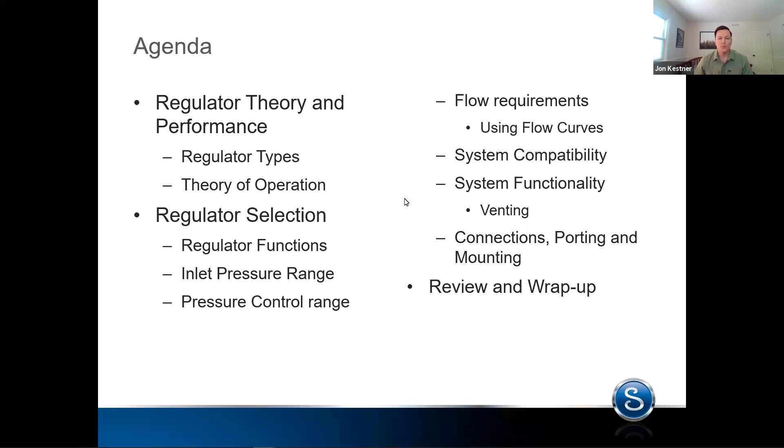So when we think about the types of regulators in general, the first thing to consider is, what are we actually asking these units to do? There are 2 major types of pressure regulators that you see in industry, and that's pressure reducing and back pressure. Pressure reducing are far and away the most common type of pressure regulator. If you hear anybody mention regulator or pressure control valve, most often they're talking about a pressure reducing regulator.

We'll talk more about that a little bit later.

Now, on the other side of the process, there's back pressure regulators. These actually work in a similar but slightly different way, governed by the same inner workings, but back pressure regulators control the upstream pressure. So where pressure reducing regulators are most interested in what's happening downstream, controlling the outlet pressure, back pressure regulators control what's behind them - they control the upstream pressure.

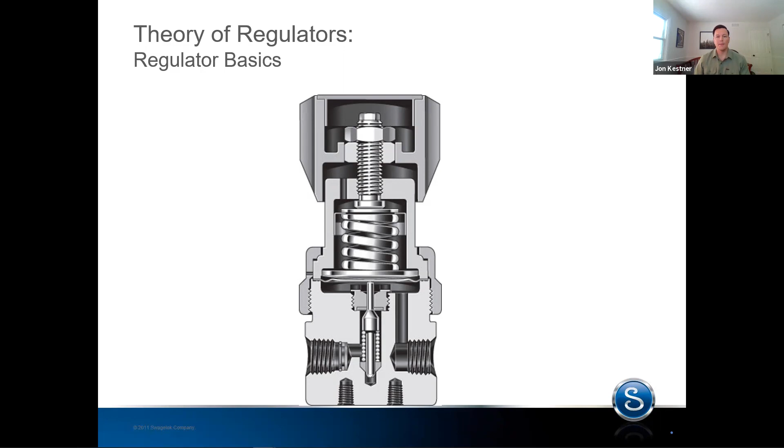When we think about regulators, there's a lot of components, but we really only care about 3 elements. Those 3 elements work together to do the job of a pressure regulator, which is essentially to divide the system into high pressure and low pressure. So within a pressure regulator, there's 2 zones, the high pressure zone and the low pressure zone. Those are divided, or the pressure drop happens, at the poppet and seat interface.

So in most every regulator, you're going to have some sort of a valve which will interact with a seat, and we call that the control element. The combination of those two is the control element, because it controls the pressure drop. So that's really where the work is done in a pressure regulator, right here at that control element.

So as the poppet moves away from or closer to the seat, you'll get varying levels of pressure drop depending on what your system flow demand is. So the control element is a very important piece of regulator performance and behavior. You'll hear me talk a lot about it today.

Now, next, we as users of regulators need some way to tell that regulator what we'd like it to do. And we do that through the loading element. Most commonly this is a spring, although we will talk about other loading types, namely dome-loaded regulators, a bit later in the talk today. Most often it's going to be a spring, which can be compressed or relaxed based on how the user turns this handle. You turn it clockwise, you compress that spring; anti-clockwise, you allow that spring to relax. And that loading element is really telling the regulator what it should be doing - what the outlet pressure should be on the low pressure side of the regulator.

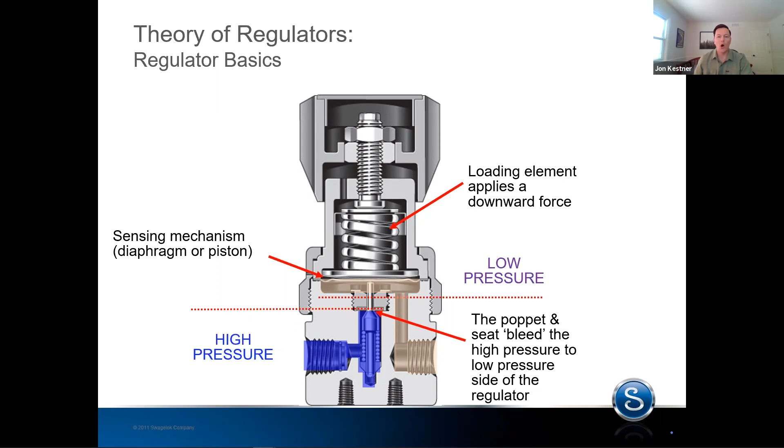So these three elements - the control element, the loading element, and the sensing mechanism - all work together within a balance of forces. That's all regulators are trying to do: they're constantly trying to balance all of the forces within that unit so that you get the output that you want. And there's four main forces that we're concerned with.

One is the loading force. We talked a little bit about that - that's as the user turns the handle, they're either going to compress or allow that spring to relax. And so that's going to create your loading force.

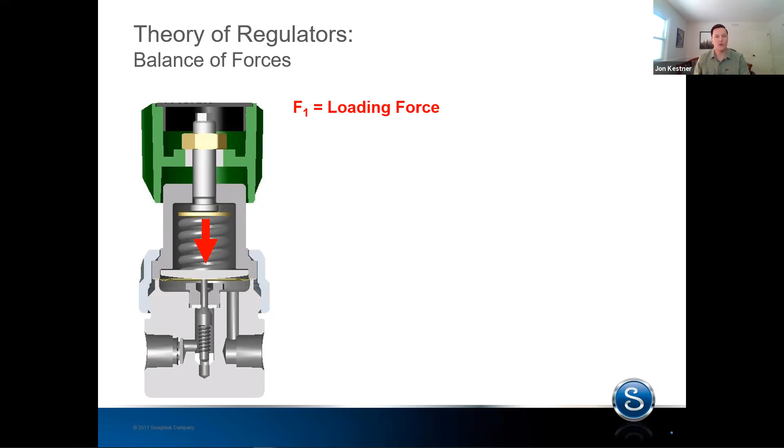So as you compress a spring, depending on the spring rate, you'll get some sort of force out of that. That generally acts in a downward direction.

Now there is an inlet spring force. We'll talk more about this later during selection, but most pressure reducing regulators have a spring that sits just underneath the poppet to help keep that poppet shut if there's little or no inlet pressure. That spring does impart a force. It's pretty small, but we need to consider it as part of the equation.

That generally acts in an upward direction. Now the outlet pressure force - this is what we care about, right? This is why we're using a regulator in the first place, because we want some pressure on the outlet side. Now that pressure acts on the sensing mechanism, the area of that element, and creates a force. Pressure times area gives you a force, and that generally acts in the upward direction.

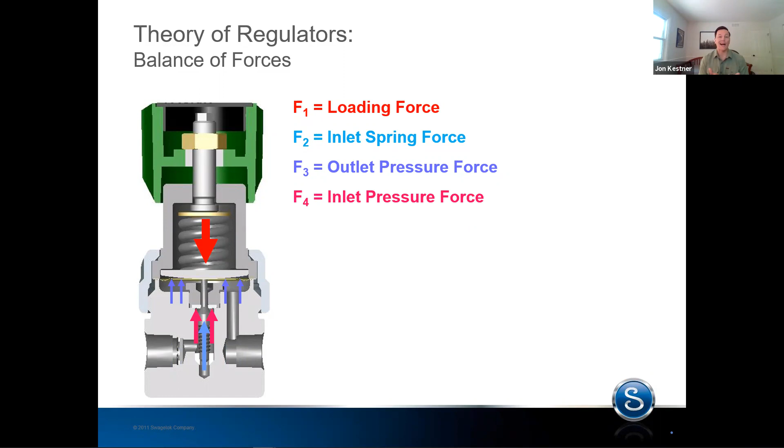And now finally, while a smaller area, the inlet pressure is generally high. So the inlet pressure force is also something we need to consider. That is the force, again, pressure times area on the poppet. And that generally, again, acts in an upward direction.

Now, following along, it's pretty clear how these all balance out. The inlet spring force and both pressure forces, outlet and inlet, work to counteract the loading force. This happens as the system parameters change, as user inputs change. These forces are constantly changing so that the regulator can stay in balance.

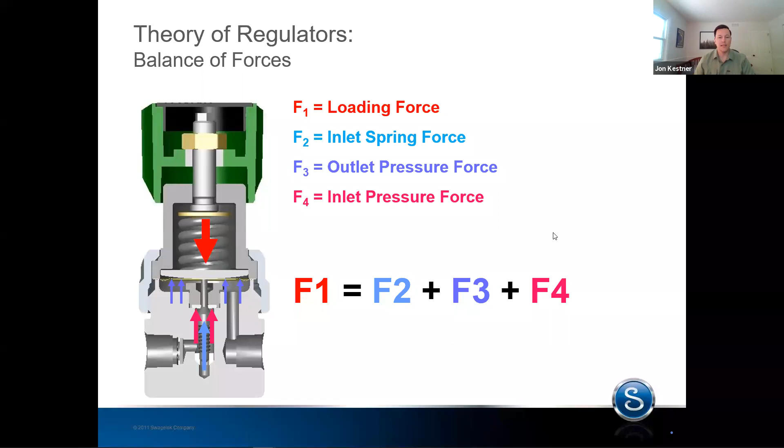A really great example of this is, as the user changes the position of that handle and we compress the spring, the loading force goes up. We compress the spring, greater loading force. Now the regulator's out of balance - our F1 has gone up, but nothing else has changed yet. So it needs to react.

The inlet spring force, that's not really going to change in any effective way. The inlet pressure force, for this example, let's just assume we've got a substantially large amount of volume - that's not going to change very much, which leaves the outlet pressure force, the only thing that can react to rebalance that regulator.

So as we turn the handle and create a greater F1, we get a larger outlet pressure force. This is exactly what happens when you set a regulator. You're compressing the spring, throwing the regulator out of balance, the poppet moves to allow more pressure downstream and ultimately rebalance the regulator. You'll hear me come back to this time and time again throughout this discussion because it is the equation that really underpins all regulator behavior when you're using them in the field.

So any questions on the theory or operation before we get into selection? I know that was pretty fast, but I like to set up the selection using the operations.

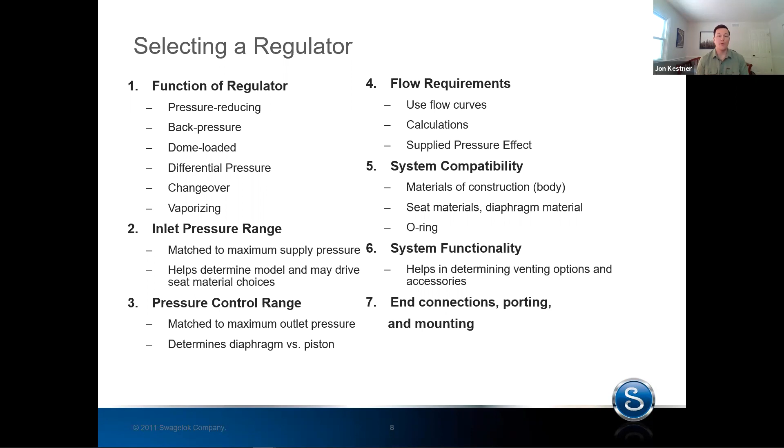The others like system compatibility or function or the end connections, you got to do those with most every component that you select. They're important for regulators too, but it's not something that's specific to regulators and requires a bit more digging into. So most of the time that we spend today, we'll be talking about the inlet pressure range, pressure control range, and the flow requirements, and what effects those have on regulator selection and ultimately behavior.

So the first thing is the function of a regulator. We just talked a little bit about this, right? The two major breaks in function are pressure reducing versus back pressure. So that's really, do you need to drop pressure or are you limiting pressure? Within those buckets, there are some specialty functions, things like differential pressure. That's if you want to reference another point in your system and have the set point actually track along with that reference pressure. You can do that with a differential pressure regulator.

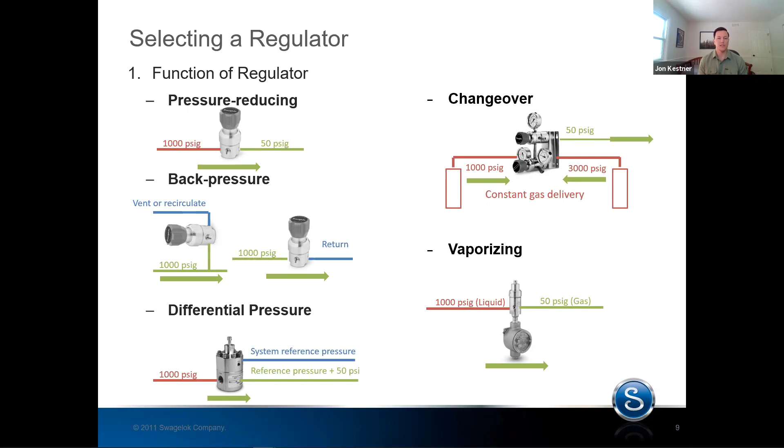If you need continuous supply from a depleting source, something like a changeover regulator can be very helpful. Or if you need to introduce heat or actually promote phase change, a vaporizing regulator can be very helpful. So there's always going to be these little nuances within each bucket, but the main choice is pressure reducing versus back pressure. So once we've figured out our function, and a lot of times that's driven by your system, right?

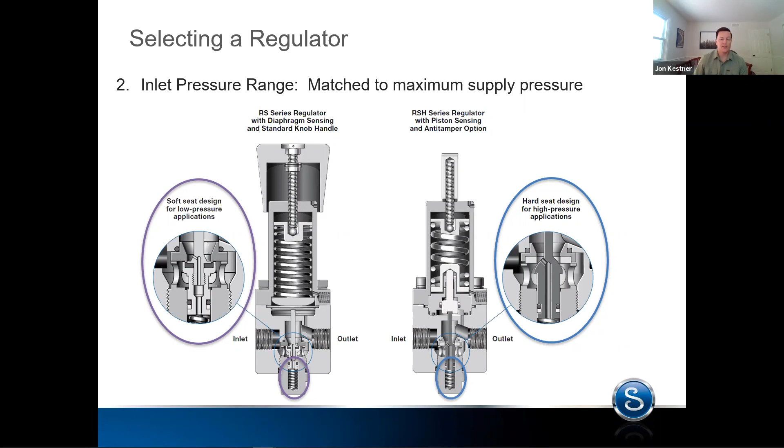What do you need? The next choice really is, what inlet pressure capability should I choose for my regulator? The recommendation always is match it to the maximum expected supply pressure. That's going to drive a few different aspects of regulator behavior, specifically the control element and the seat material more than anything else. So the inlet pressure range is really focused on the control element. Some of the other choices will affect the sensing or loading elements, but inlet pressure range is really focused on that control element, which can affect portions of a regulator's behavior, one of which is lockup.

If you've used regulators before, you've probably experienced this. You may have heard the term lockup, and lockup is the change in pressure when a system that a regulator's in goes from flowing to non-flowing or non-flowing to flowing. So it's this sharp tail that you get right at about zero flow.

If you imagine a valve being turned off in a system, your outlet pressure will uptick slightly. What that's related to is the force required to shut off the seat. Regulators are not shut off devices, although they will shut off. So there's an important distinction there, in that the regulator's closing force is limited - it's the inlet pressure that can force the regulator shut plus the poppet spring.

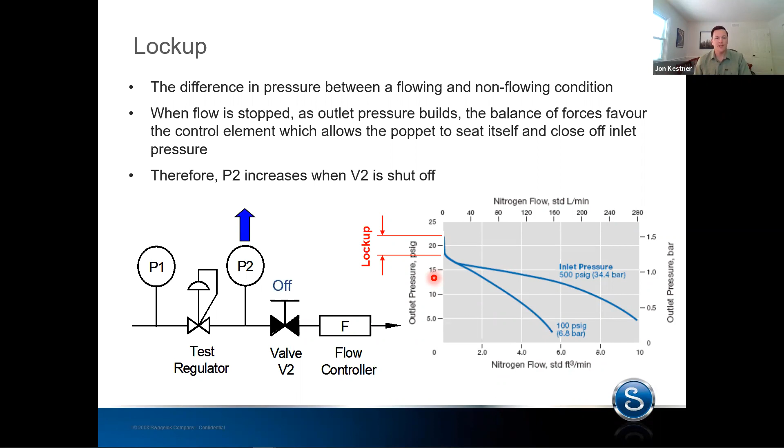So it's not only the lockup pressure that seat material can affect, it's also the ability for that particular material to resist what we call creep. Creep is a very common issue that we see in regulators across the board - all different systems, all different types of regulators. And that is the increase in outlet pressure over time when the system's not flowing. So it's effectively a seat leak when you have that system shut off.

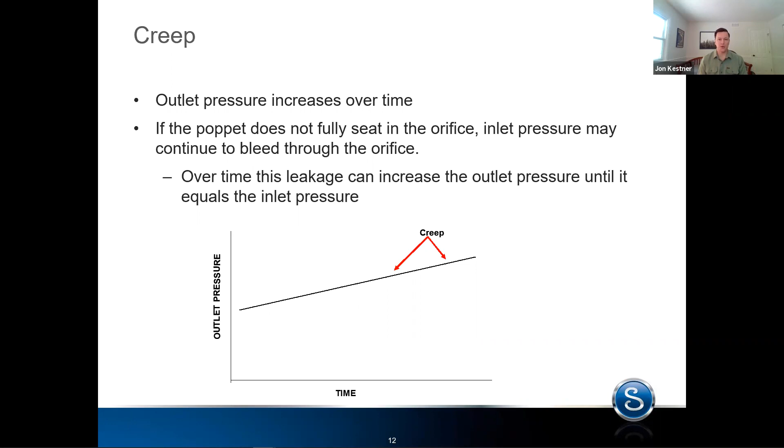What mostly drives seat creep is particulate or damage on the seat itself. We really see two major culprits of seat creep. One, usually we see very early in a regulator's life, is something like a tubing burr - in a newly assembled system, maybe there's a burr that didn't get fully flushed out before the system was put together. That burr, because of the small gap here to create that pressure drop, will almost always get caught in that seat if it makes it there. So you can imagine as that poppet then tries to shut, if there's that metal particle in there, it won't be able to deform the seat around that particle, and you'll get a slow seat leak or creep.

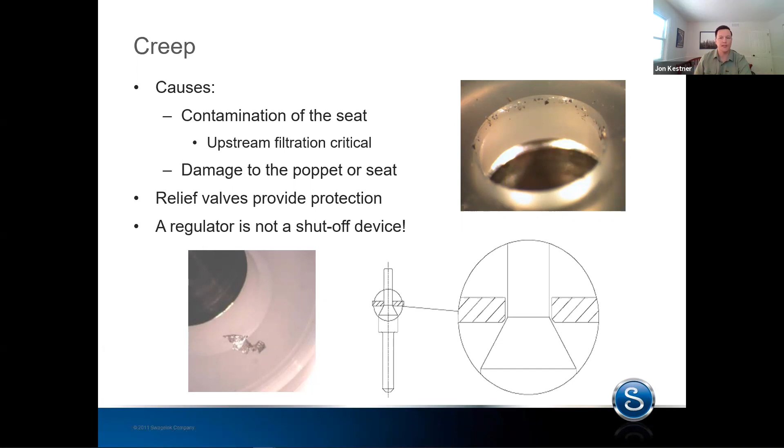Now on the further end of a regulator's lifetime, it's been in the system for a while, it's been working well, but over time maybe has accumulated some debris through bottle changes or whatever else. Over time, you could see regulators develop a seat leak as these particles reach a kind of critical mass, and the seat can no longer deform around those particles. When a regulator is flowing, this usually isn't a big deal because the balance of forces will compensate for any changes in the seat. But when you shut off a regulator, that's where you can really run into some issues.

So if we think about creep in this system I've got up here, the downstream components are selected to handle low 100 PSI, but we have a high pressure system. So we need to make sure we're not allowing that high pressure to bleed into the low pressure side. If this regulator displayed creep, then maybe this 100 creeps up to 110 or 150, or if it's really bad, you could get to a situation where the high pressure inlet equals the low pressure outlet, which would be very high pressure at that point, right?

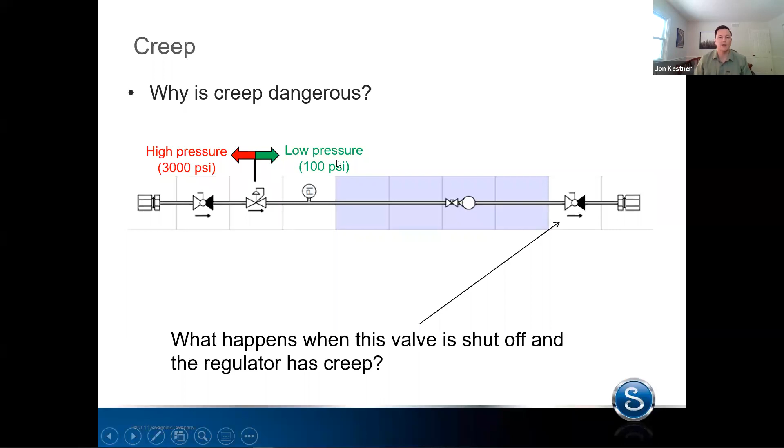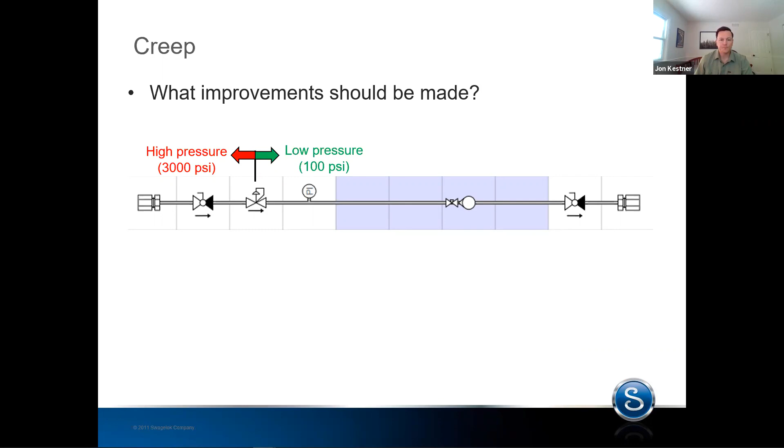3000 PSI. So there are things we can do to mitigate the risk of creep outside of seat choices, which we'll talk about next. But one of them is filtration, right? So we can filter any particles upstream of a regulator. It's always a best practice if you can include a filter upstream of the regulator.

Our standard with integral filters for the models we sell that have integral filtration is 25 micron. It seems to cut a good balance of particle filtration and lower flow resistance, right? So you don't want something so restrictive that it'll catch all the particles, but then your flow performance is impacted. So 25 micron seems to be good.

You can also add a relief valve just downstream of the pressure regulator. This is pretty common, I see this everywhere, right? It's a pretty common engineering practice, where you have a stretch of the system that needs to stay at a certain pressure. Very often that's protected by a relief valve. It's a really good practice if you're not already doing it.

And then finally, one that I think gets overlooked very often is, if you can, just shut off upstream of the regulator. Because again, regulators will shut off, but they are not shut off devices. If you have a situation where there is some creep on a regulator, you don't have the opportunity to get in and really crank down on the handle like you would for a needle valve or anything like that, where you can introduce some extra closing force. You're kind of stuck with what the regulator has. So if you can, shut off upstream. It's not always possible, but if you can, it's a good thing to do.

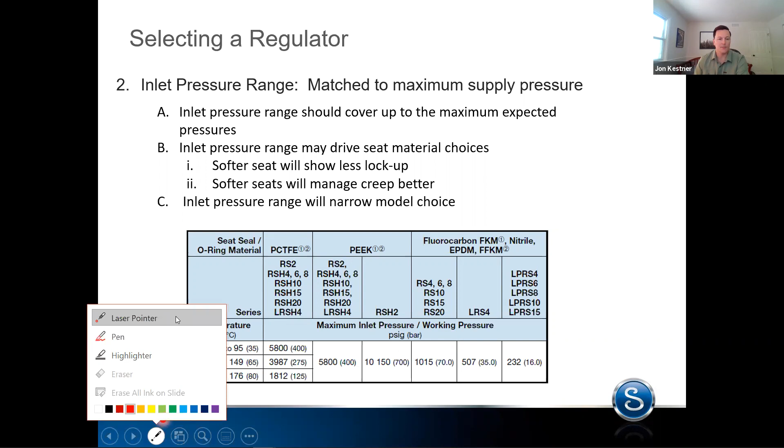So if you have a regulator where maybe it's a system of 800-900 PSI inlet, and you're thinking, well, should I go with the hard seat and extra pressure capability? If the specs call for it, absolutely. But if you have the choice and lockup and creep are a concern, using an elastomer seat can be really helpful. So something to consider there. Now, sometimes the inlet pressure makes the choice for you. If you've got a few thousand PSI inlet, you have to use a hard seat. Just keep an eye on creep for those models because they can show creep just like any other regulator could.

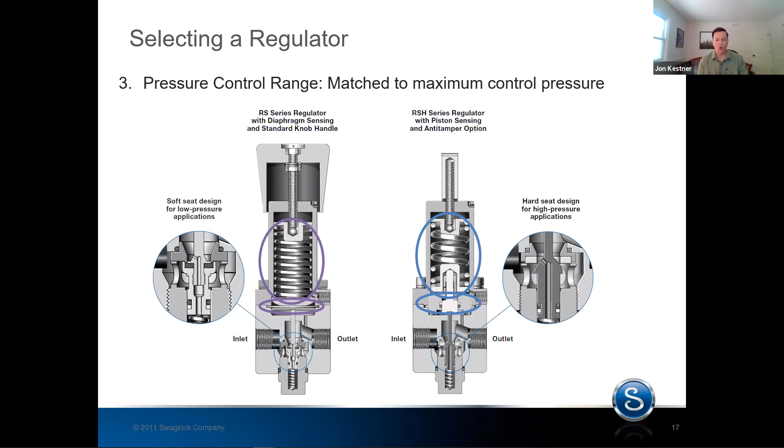So once we've selected an inlet pressure range, we need to move on to the outlet side. So we selected for the high pressure zone. Now we need to select for the low pressure zone. And this really is related to the loading element and the sensing element. Choosing a control pressure that's most closely matched to the set pressure will give us the best control out of that particular regulator. So the first split is a lot like our seat choice, right?

Generally governed by what pressure you're controlling downstream. Diaphragm sensing elements are typically used below about 500 PSI. They've got high sensitivity and will respond quickly to system changes. Generally, they're thin pieces of metal or elastomeric materials, right? So really flexible.

They offer a really good sensitive reaction for the regulator, but because they're thin diaphragms, they are limited on what pressures they can control. Now, pistons give you a much wider pressure control range, but because they also vary in size—lower pressure pistons will be bigger, higher pressure smaller—they'll give you variable sensitivity. Sensitivity is a function of the area of that sensing element.

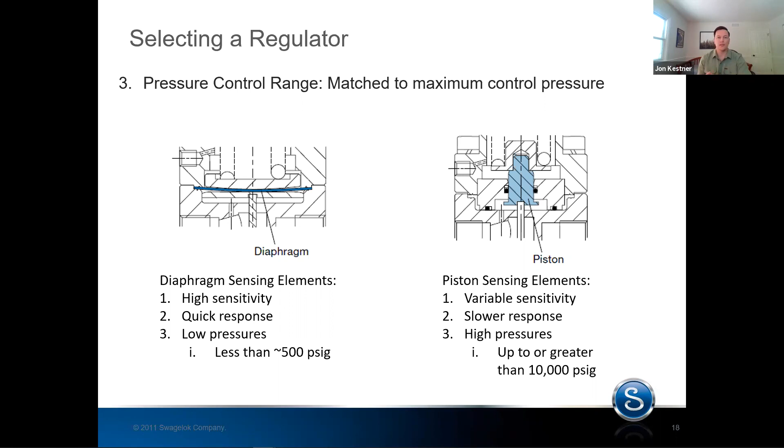They also will respond slower, which initially sounds all negative, but in some systems, like those with positive displacement pumps that might have some residual pulsation, a piston style regulator will handle that a lot better than a diaphragm style will, and can actually dampen out some of that activity. And of course, they can be used at much higher pressures.

So the pressure control range also impacts the loading element. I talked before that the loading element is what we, the users, get to interact with, and that sets the outlet pressure. So what I want to show is what happens to a regulator as the flow demand from the system increases. This is called droop.

For anybody who's watched a regulator work and changed the flow demands, you've likely seen this or experienced it, or even heard the term droop. It's one of the most common performance aspects of regulators that folks are concerned with. So what I want everyone to watch is the outlet pressure—it's going to decline as we increase flow. But also take a look, and I'll run through it a couple times, at the control, sensing, and loading elements and how they react to the increase in flow rate.

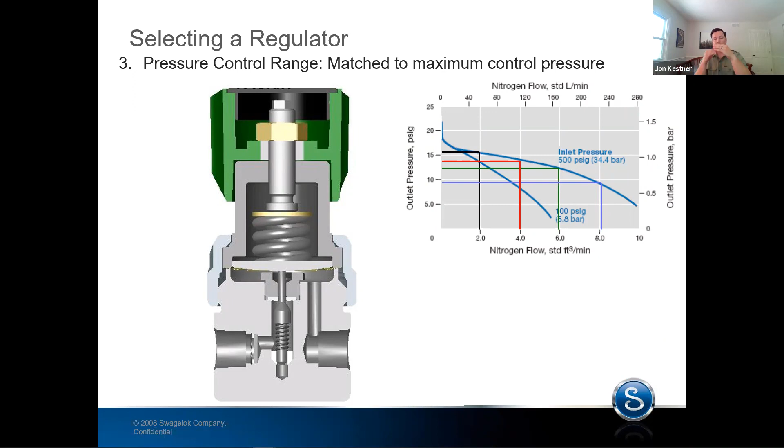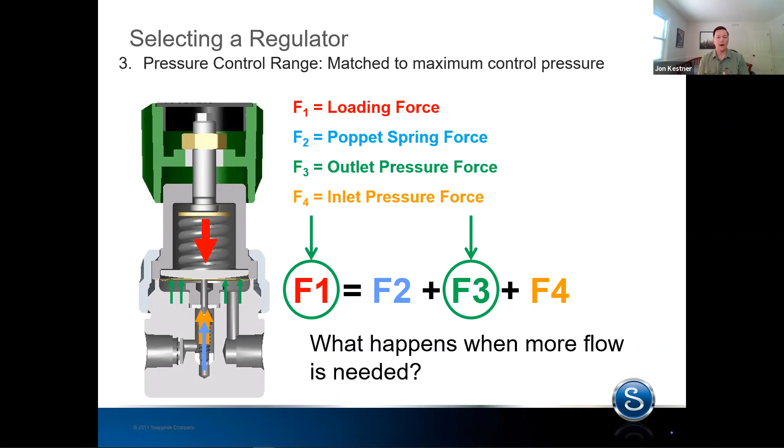As we increase the flow rate, we're seeing that the poppet moves away from the seat. It wants to maintain the same pressure drop with more flow, which means it needs to move further away. But that also allows the loading spring to relax slightly. As that poppet moves away, that loading spring can relax, which, if we remember from setting a regulator, means the F1 is actually going to go down. Different than when we were compressing it by turning the handle, here F1 goes down. And just the same as setting a regulator, F3 will also go down by some proportional amount—not 1-to-1, of course, but it will go down by some amount. That's what drives your droop in spring-loaded regulators.

So in spring-loaded regulators, the droop is a function of the spring rate used in the loading spring. What that means is if you have a pressure regulator set to 90 psi outlet, and you use a 0 to 250 psi control range, that will show some amount of droop. Now if you use the next lowest control range, say 0 to 100, that spring will actually show better droop performance because the spring rate is lower. So for every millimeter that spring is allowed to relax, you give up less force, and your droop performance is actually better the lower the control range is.

This is a bit different than what most folks expect, especially having worked with things like gauges. With gauges, you want to be in the middle if you can, or at least the middle third. For regulators, they're quite happy to work all the way up to and including the upper end of their control range. In fact, you'll get a more accurate and more consistent pressure out of a lower control range than you would a higher control range. I think instinctually, folks select regulators to pair with their pressure gauges—it makes sense, those two go together quite frequently—but the approaches are a bit different. Gauges are most accurate in the middle. Regulators are actually most accurate with a lower control range, even if that means operating at the higher end.

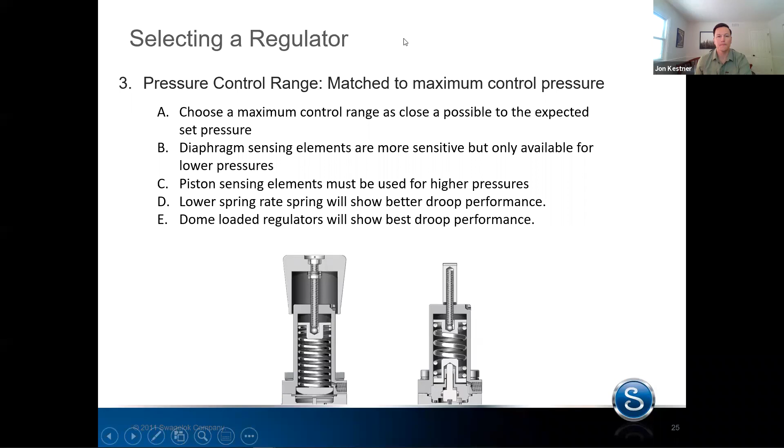Okay, so flow requirements. This is one that I get asked about almost every time I talk about regulators: how do I know how much flow I can get through this regulator? Or, I have this amount of flow, what regulator should I use? It's a principal concern of selecting a regulator. And what I always say is that bigger is not always better. In fact, it never is with regulators. You want to find the smallest seat that can carry the flow rate you need. That gives you the best accuracy and most consistent performance across the life of the regulator.

So to do that, you want to use, first and foremost, the flow curves, because this is tested data showing what the regulator is actually doing during a test, versus calculations, which are very helpful, especially with larger regulators, but you really can't determine droop from calculations. We'll talk about both in just a second.

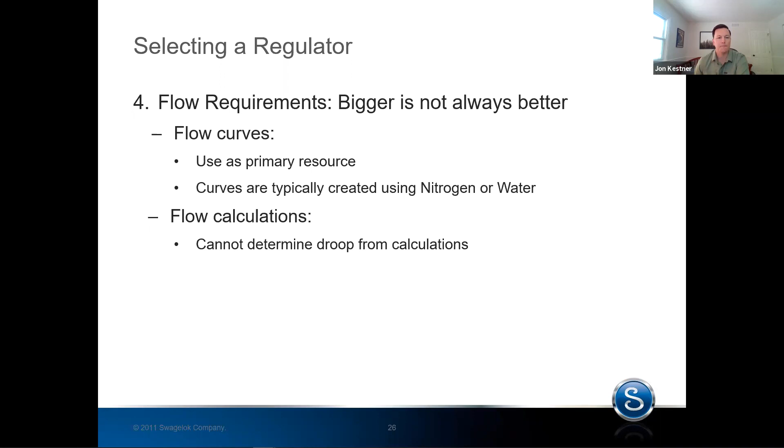So in terms of flow curves, you can learn a lot. There are two primary ways flow curves are used. One is, will this regulator work for my application? That's the one I want to cover first. Before we get into that, I'll cover a little bit of what info you can get out of a regulator flow curve.

Now the chart tells you outlet pressure versus flow rate. So as my flow rate changes, how is my outlet pressure going to vary? That's really what we want to know as regulator users—how consistent is my outlet pressure going to be. So for answering the question of whether this regulator will work for a particular application, flow curves are a great place to start.

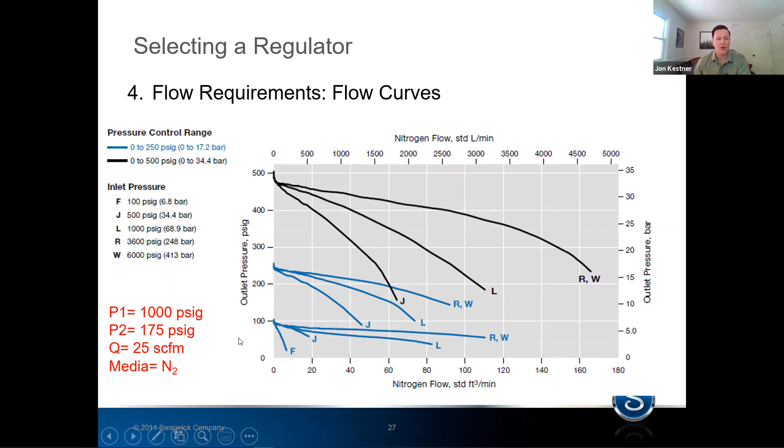Next, we want to find the L curve that covers our outlet pressure. To do that, we start at our flow rate—about 25 SCFM—and start drawing a line upwards. We hit our first L curve; that's not nearly enough pressure, so a set point of 100 obviously isn't going to work. Next, we continue drawing up and up until we hit the next L curve—and look at this, it's actually above 175. So we know we can get at least 25 SCFM with 1000 PSI in.

In this case, it's set all the way up at 250, but we probably don't even need to do that. We can set it a bit lower and still achieve our 175 PSI pressure limit.

So what we know is for this system, a pressure regulator with 1000 PSI in and 250 out will cover 175 PSI at 25 SCFM. So that's one way that we use flow curves.

The next is, how much pressure change should I expect from this pressure regulator when I put it into my system? Same kind of setup. You can see in this curve, we actually printed the inlet pressures on the curve. The first thing to do is find the right curve. In this case, we have 507 PSI or 35 bar inlet pressure, so we know we need to use one of these curves. We also have a static set point, so a zero flow set point at 250, so that means this 507 curve is the one we want.

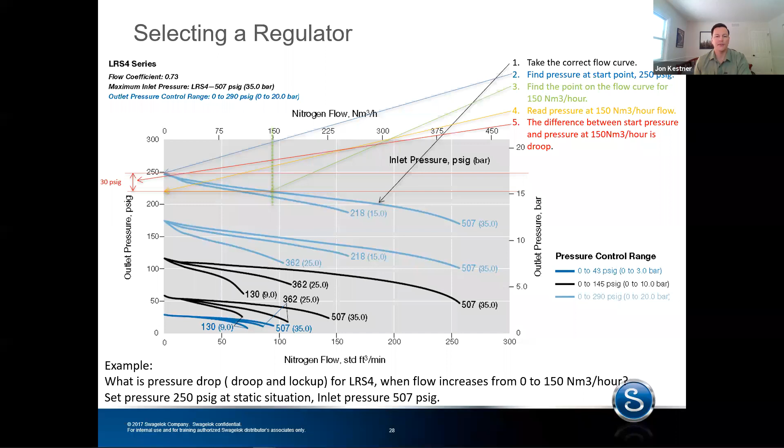And obviously you can also do that in the bar scale.

Now, we also can size regulators using calculations, and each manufacturer has different ways of doing that. For Swagelok, when we calculate a regulator size, we aim to put that regulator in the one-third to one-half of the way through its flow capacity, right in the middle part of its capacity from a flow perspective. Now, what we don't get when we just do calculations is any way to know what the droop will be. Historically, those were the two choices.

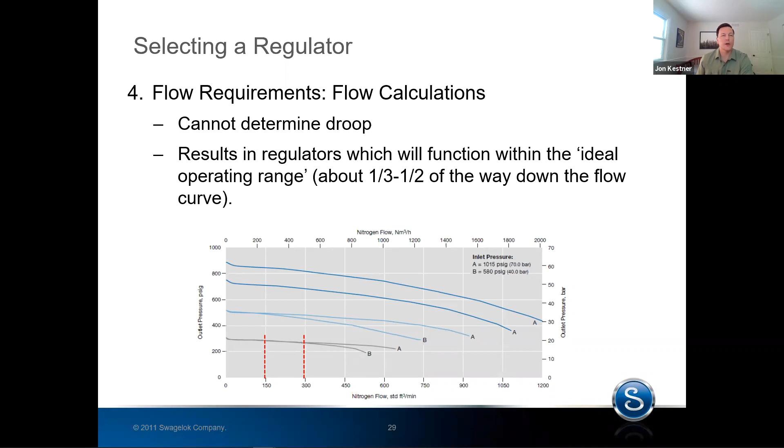A few years back, we created a flow curve generator. Essentially, we took that mathematical model and applied it to varying flow rates. It was actually a really cool exercise to do with the product engineers for regulators and our CFD folks, who came together to create this flow curve generator, which is a bit of a mix of both methods. So it is calculated, they're not tested curves, obviously, but you do get a sense of what kind of droop performance you could encounter, and that is for your specific application. It's available on swagelok.com, available to everybody if you want to use it for sizing regulators. You put in what regulator you're interested in, all of your system parameters, and it'll spit out what kind of performance you could expect. You can also compare two separate regulators, or the same regulator in a few different systems, and you really get some good flexibility there. So it's a great tool to use if you are sizing or trying to determine regulators for a specific system.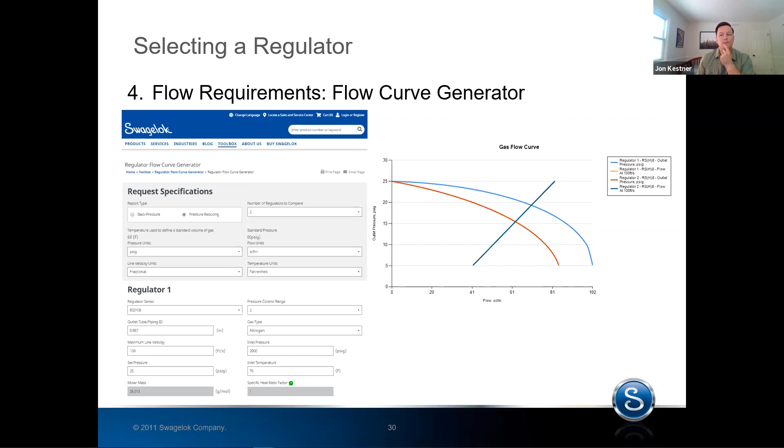At the beginning of this section, I mentioned that bigger is not always better, and one of the principal reasons why is the supply pressure effect. The supply pressure effect is the way a regulator reacts when you have a changing inlet pressure. Up until now, we talked a lot about what happens when the flow demand changes or the operator changes the position of the handle, and how the outlet pressure changes. But very often these regulators are connected to gas cylinders that over time have a tendency to deplete. As you're using that gas, that pressure is going to go down. So what we need to understand is, what does that do to the balance of forces?

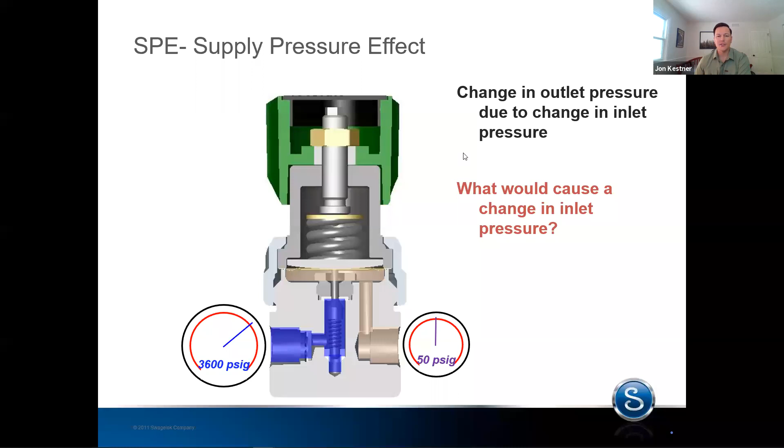Coming back to how regulators operate, if we think about the four forces, these will be impacted by a change in inlet pressure. Now F1 and F2, the two spring forces, we're not changing the loading force at all, and we're also not going to change the inlet spring force because that's built into the regulator, so those two are constant. But as your inlet pressure drops, so will F4, because F4 is a function of your inlet pressure. So as your F4 decreases, the only thing that can maintain balance is F3.

So F3 is actually going to increase slightly in proportion with that F4 decrease. Now, it's not one-to-one, right? That would be really problematic if you had a gas cylinder that starts at a few thousand PSI and drains down to a couple hundred, if you had the same outlet pressure rise. The amount of rise, commonly called the supply pressure effect, is related to the ratio of areas on the poppet—what area the F4 is acting on versus what area your outlet pressure is acting on, F3. So the ratio of these two areas is what gives us the supply pressure effect.

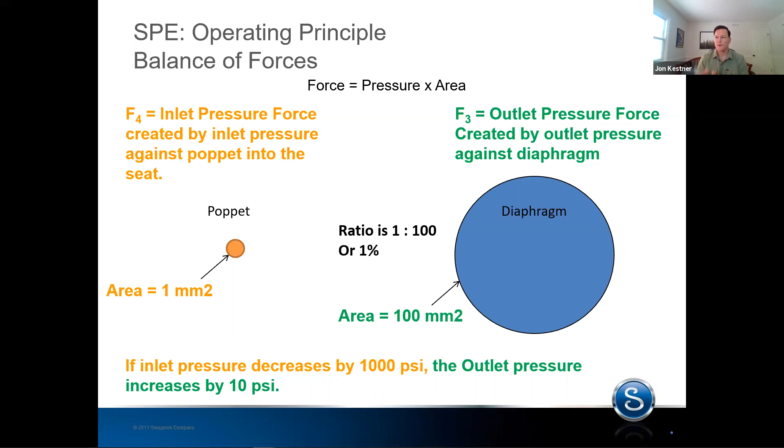So as a quick example, making the math easy, if you had a 1 millimeter square area on the poppet, so that's your seat area, and 100 square millimeter area on the diaphragm or sensing element, you would have a 1% SPE. So what this means is if your inlet pressure decreases by 1,000 PSI, your outlet pressure will increase, but only by 10 PSI—1% of 1,000. So let's look at a practical example to talk through it a little bit.

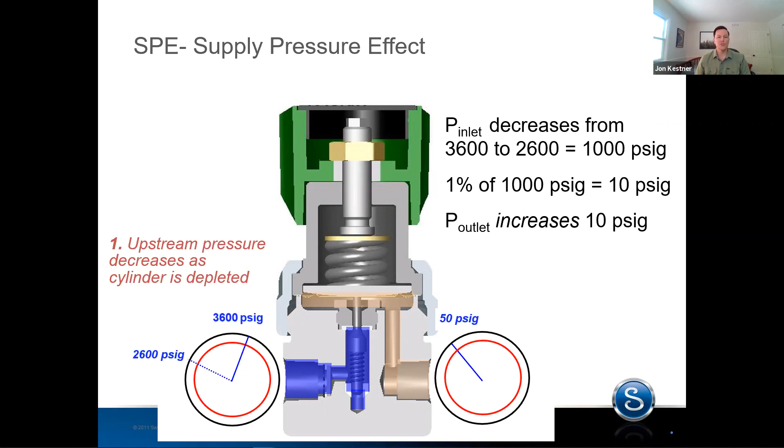So we have a regulator hooked up to a gas bottle that starts at 3,600 PSI, and we've got an initial set point of 50 PSI. So as my upstream pressure is depleted, 3,600 to 2,600, and we know that this particular regulator has a 1% SPE, that means that my outlet pressure actually increases by about 10 PSI. So as that upstream pressure depletes, the outlet pressure will rise by 1% of the inlet's depletion, which in this case is 10 PSI. For some systems, this is fine—it doesn't cause any issues. But where it does, we need to think about ways to mitigate supply pressure effect.

And one of them clearly is just maximize the ratio. So use the smallest seat you can with the largest diaphragm that you can, right? Which in many cases for general industrial regulators is just choose the smallest CV that you can that'll carry the flow rate you need. And that will give you the best supply pressure effect performance.

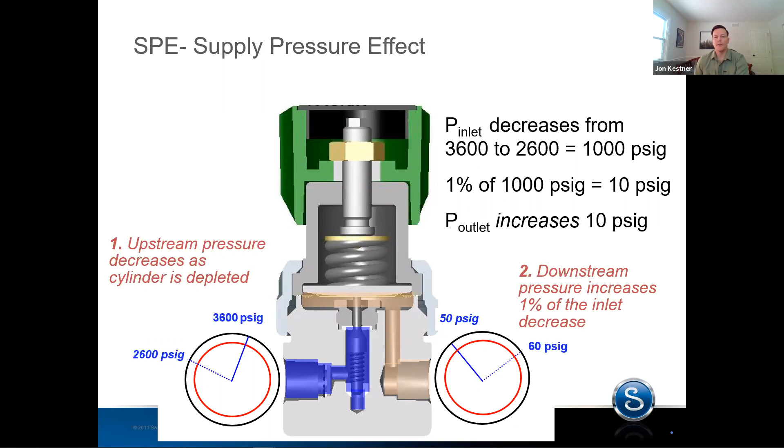Now, where that's not possible, or you need to have, for one reason or another, a regulator that still doesn't quite meet your SPE needs, the next best way to mitigate is actually using two regulators. So if we think about what happens with the supply pressure effect at each stage, we'll better understand why this is such an effective way to combat the supply pressure effect.

So in this case, again, we start at 3,600 PSI, we end at 50 PSI, but we have a middle stage pressure of 500. So that first stage is actually set to 500, which is in turn the inlet for the second stage. So let's watch what happens as we drop pressure. We go down this time by 2,000 PSI on the inlet pressure, which creates an increase in the outlet pressure of the first regulator. That's what we expect, up to 520 PSI, 1% of 2,000.

Now the second regulator only sees this increase. The change it sees is an upward change of 20 PSI. So it reacts in the opposite direction, it actually goes down, but only by 1% of the 20 PSI. So down by 0.2 PSI, which if you're looking at an analog pressure gauge, you really won't even notice. It's not going to affect your system. It's effectively eliminated the supply pressure effect.

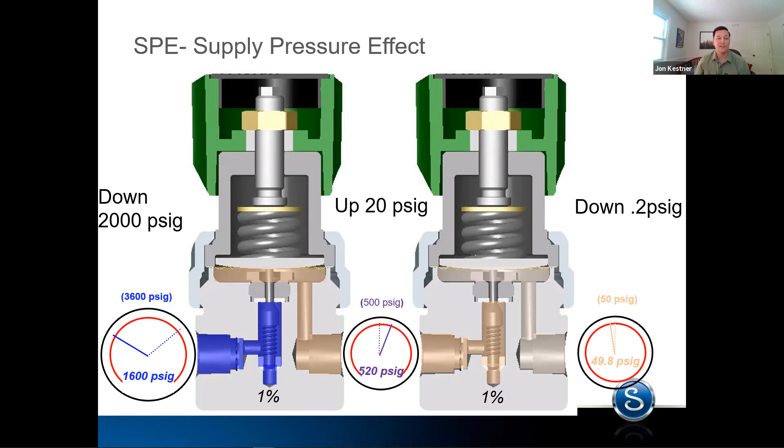So two-stage systems or two-stage regulators are really effective at reducing the supply pressure effect, especially where you need to use a larger seat for the flow capacity. And they come in all different varieties, right? You can make your own two-stage system like you see here with 2 regulators, or Swagelok certainly does, and other manufacturers do too, where you can combine those regulators into one body.

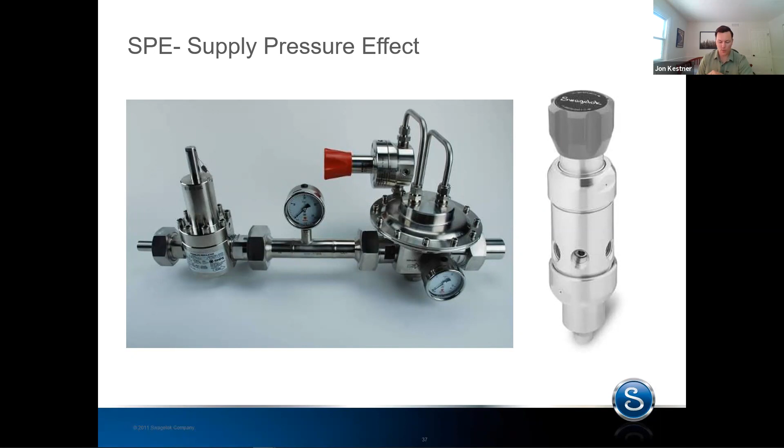So when we think about flow requirements, again, bigger's never better. Use the smallest seat you can by using the flow curves to determine what regulator is most appropriate. And flow curves are the first choice, of course, and calculations are kind of a second after that. Now, if you can use something like the flow curve generator that we've got, it kind of mixes both, right? But using that small seat will minimize SPE, and you might not even have to go to a 2-stage system.

What questions do you have on flow requirements? Jon, we had a question just a minute ago. How is the CV calculated? Do we have customized CV values for different customer requirements?

Good question. For most pressure regulators, and this is true for all Swagelok regulators, the CV that's posted in the literature is a full open CV. As you can imagine, regulators are constantly changing their CV as the poppet moves closer to and further away from the seat. So the most consistent position to measure a CV is in the fully open position.

That also has the knock-on effect of giving a very good indication of what the fail open flow rate would be for a pressure regulator, which can be really important when sizing things like relief valves or orifices.

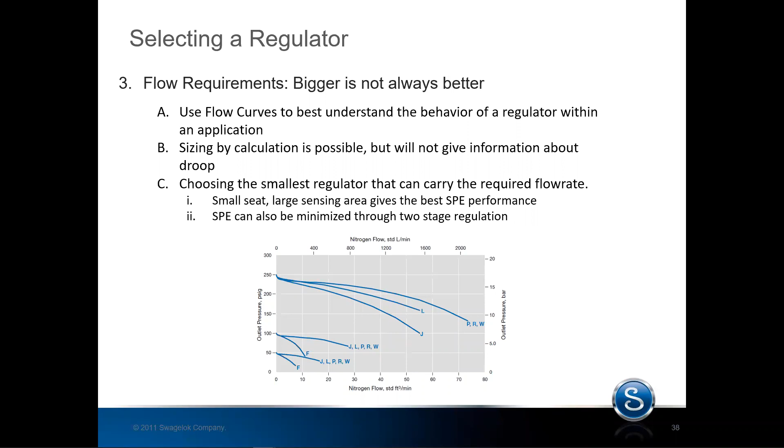Okay, it looks like we have another one here. What is the need of a back pressure regulator when similar operation is performed by a relief valve? Yeah, it's a great question. It's something that comes up a lot.

The main difference is control. So for those systems where you want to have fine control of your upstream pressure, a back pressure regulator is going to do a much better job than even a proportional relief valve.

So things like a safety valve, which slam open, obviously you don't want that happening all the time, every day, all day. But even a proportional relief valve, which opens and closes with pressure, the sensing area on a relief valve is much smaller than a back pressure regulator, which has the whole diaphragm or piston to sense that upstream pressure. So the resolution and accuracy you get from a back pressure regulator is much higher than a relief valve, although the functions are very similar.

A back pressure regulator can also be used in line, whereas relief valves really aren't. A good example of that is downstream of an online process analyzer, maybe used on a liquid line where you want to make sure the pressure is high enough to avoid the bubble point. You typically will put a back pressure regulator at the end of the line so that it maintains that upstream pressure at a high enough level.

So it provides that control by opening and closing so that you don't run into any sort of issues there. Great question, and something that definitely comes up a lot, but it boils down to accuracy and resolution more than anything else.

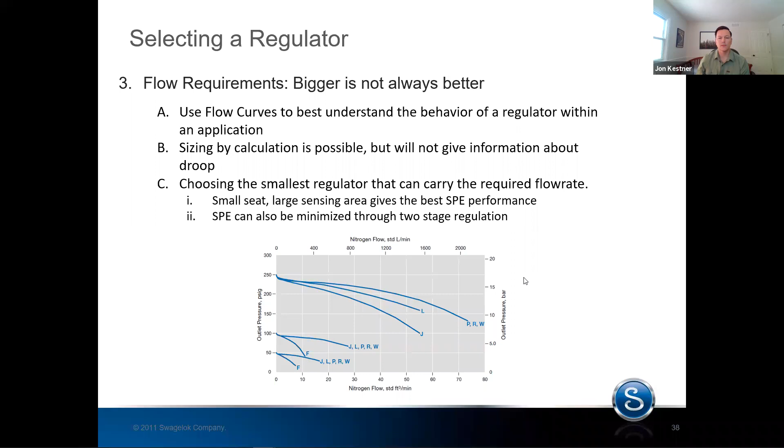What else? Okay, yeah, good questions. So at this point, we've kind of got through all the hard stuff. We know what inlet pressure we're using. We know what outlet pressure control range we're using. We figured out how big of a regulator we need. Now we need to get into some of those more detailed questions.

Are the materials of construction compatible with the fluid that I'm pushing through this thing, particularly as it pertains to the seat and seal O-rings? It's something you do with all components.

With regulators, especially for gas, there is one additional effect that we need to consider, which is Joule-Thomson. Joule-Thomson is a physical phenomenon. It's not specifically brought on by pressure regulators, but Joule-Thomson is the drop in temperature as the gas is allowed to expand or pressure goes down. So in a regulator, we're doing just that. We're dropping pressure, so we consequently see a temperature drop quite often.

And it can be significant. You could see tens of degrees, if not hundreds sometimes in extreme cases. So it's just something to consider: is the system set up to handle that Joule-Thomson effect? For natural gas, you can see about 1 degree C for every 2 bar in pressure drop, which is about 2 degrees F for almost every 30 PSI in pressure drop. So it can be significant.

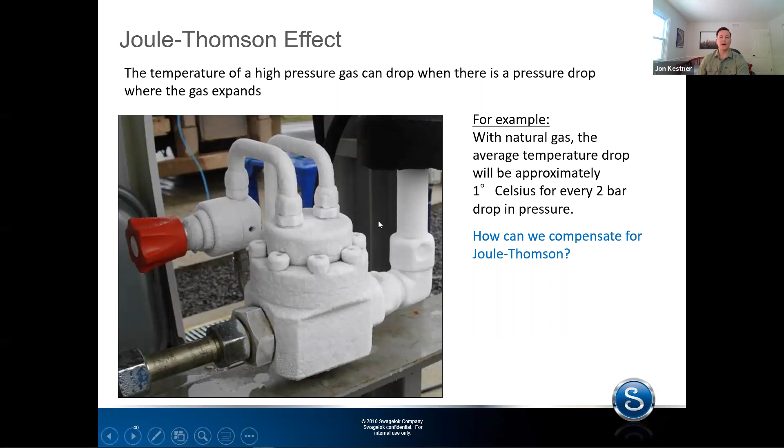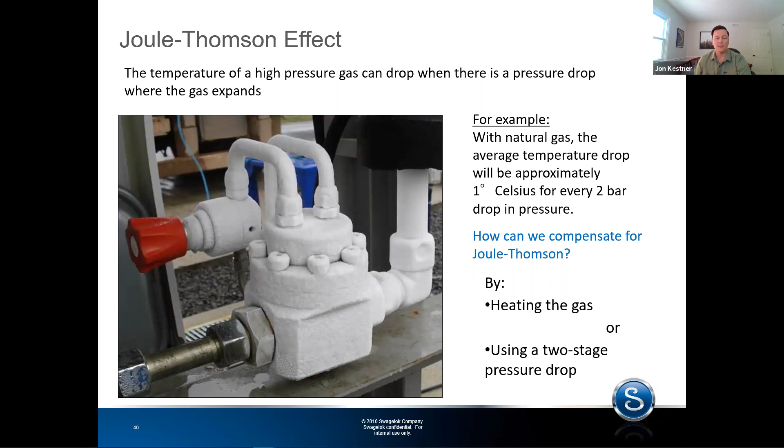You can compensate for that either by heating the gas or using 2 stages. There's a lot of different methods you can do, and don't ever hesitate to engage the local team if you need assistance there.

Now, next is how does the system function? So a lot of this is how do we as users interact with the system? What kind of handles do we have? Do we want a lockout? Where are they mounted? What kind of gauges? How is the system configured?

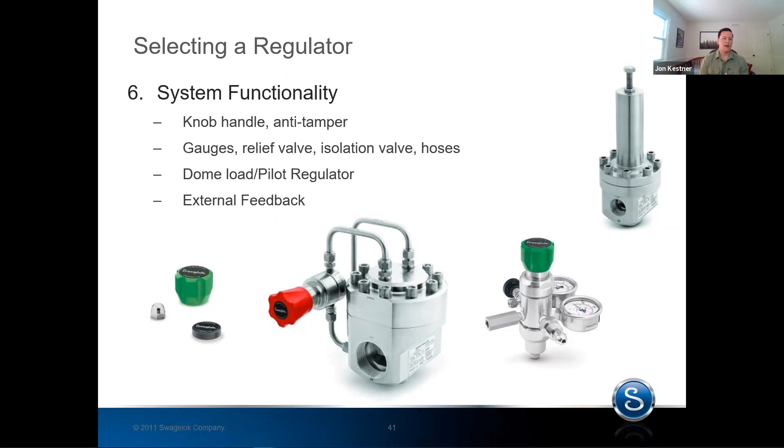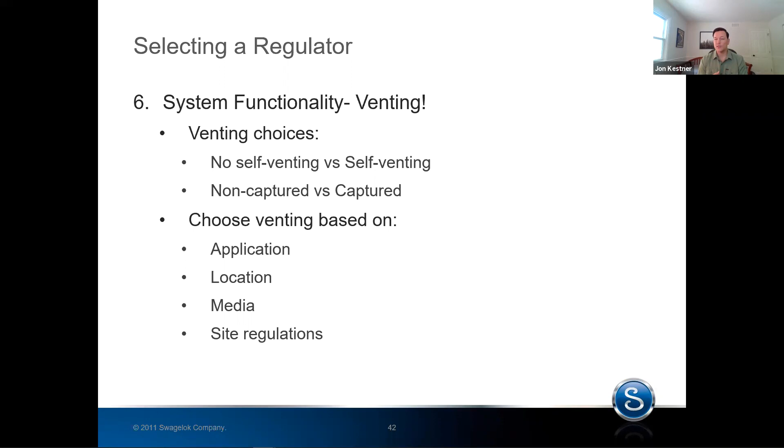One of the most important choices is actually venting. Venting is a topic that splits into two choices: self-venting versus non-self-venting, and captured vent versus non-captured. They're two independent choices we'll talk about, not really related to each other. You can have any combination you'd want, and it's all based on what you're doing with the regulator, where it is, what kind of fluid is going through it, and what safety regulations you need to comply with.

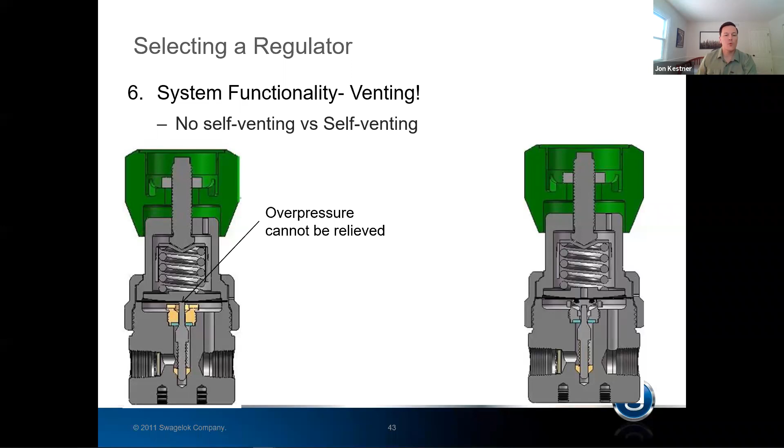Self-venting versus non-self-venting has everything to do with where the extra pressure goes. In a common configuration, a non-self-venting regulator does not give any trapped pressure anywhere to go. Imagine you closed a ball valve just after the regulator, and if we turn the handle to relax that spring, the outlet pressure won't change because the gas or liquid has nowhere to go. Whereas in a self-venting regulator, doing that same thing, the outlet pressure will actually take over and push the sensing mechanism off the seal. There are different seal mechanisms, but the simplest is just an O-ring and a hole that creates your seat, which pushes up to allow that excess pressure to escape.

Self-venting is about changing set points often. Lab benches are a great example, where you're constantly changing set points—a self-vented regulator might be a good choice there. It shouldn't be considered a replacement for a relief valve, though. The orifice is really small and the sensitivity is not great. So don't have it take the place of a relief valve, but where you're changing set points a lot, it's totally okay—I think it's a great use for self-venting.

Captured versus non-captured has everything to do with what happens to the gas or liquid as it escapes the regulator. For a non-captured regulator, in the Swagelok set, it actually escapes under the handle to avoid blasting an operator, but it does escape to atmosphere. If you're outside or in a well-vented area with a non-hazardous media, that's probably okay—nitrogen in an outside environment is fine. But nitrogen in a really enclosed space can be problematic.

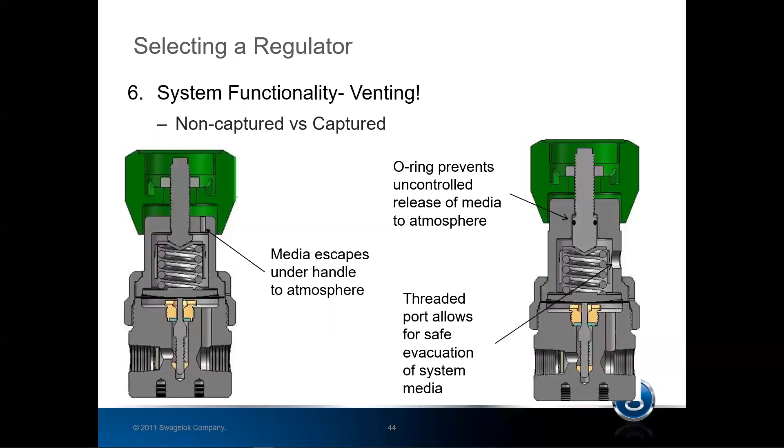Any other questions? Okay, we have another one just real quick. When exactly should a self or captured vent be used? Yeah, so it's a great question.

Whereas with a self-vented regulator, those same changes can be made on the fly, and that excess pressure will be relieved. So as you change the set point of the regulator, if the loading spring is significantly lower force than the outlet pressure, that pressure has somewhere to go. You don't have to manually vent it downstream somewhere, the regulator will do that for you. So in terms of uses, that's really the best place for a self-vented regulator.

Now, when we think about captured vents, they're all about safety. So if you have a media that is particularly hazardous, or an enclosed space where you don't want that nitrogen venting into the air, it would take a heck of a lot, but it could be problematic. That's where you want to use captured vents.

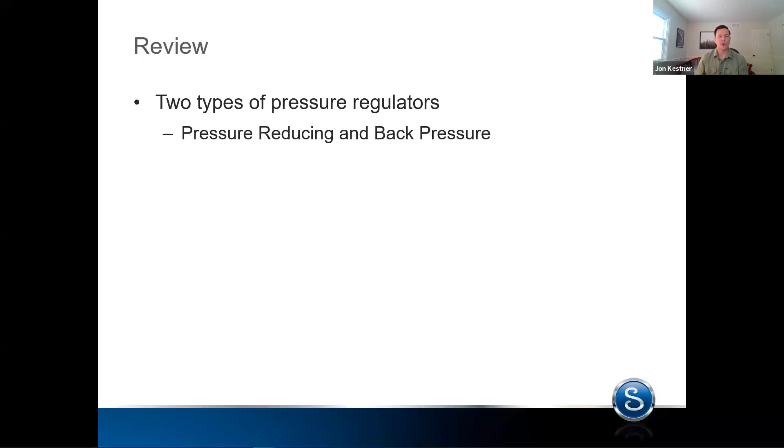There's two types of pressure regulators: pressure reducing and back pressure. Those are the two main functions, right? The control, loading, and sensing elements drive regulator performance. So changes in those elements are going to affect how that regulator behaves.

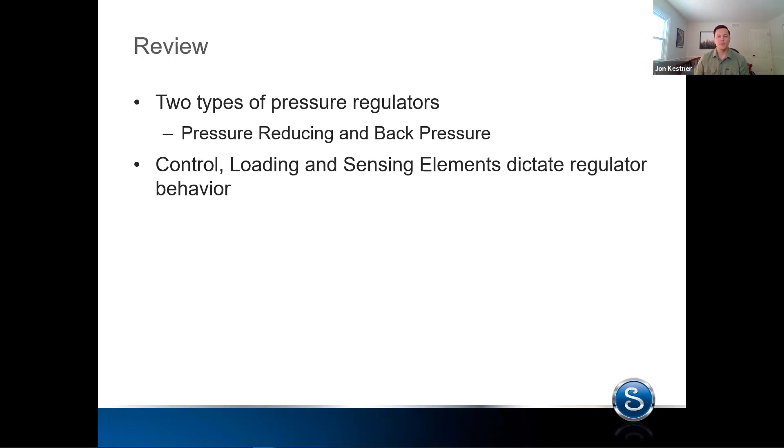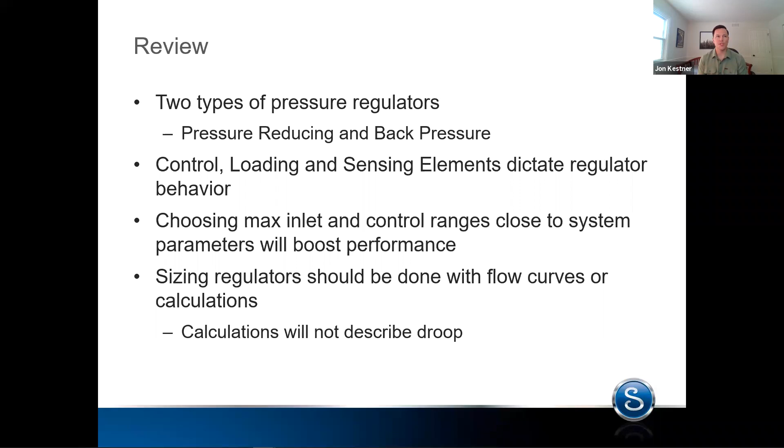You want to choose your inlet and your control ranges to be as close to your parameters as you can. It's going to give you the best performance. If you can, size regulators using flow curves. Calculations are great, they won't give you any indication of droop, but you can use tools like the flow curve generator to kind of meld those two approaches together.

And then finally, self-venting and captured vents. Those are based on the application and what kind of safety concerns you have on site or for that particular environment. And with that, follow along these steps, and you'll get to a regulator that's going to perform really well in

99.5% of applications. So, like I said, I'll hang out. I'm happy to answer any questions, any other questions that anybody might have.

Looks like we have one that says, with vent regulators, should we keep a tab on internal wetted components, spring, etc., to be changed at certain intervals?

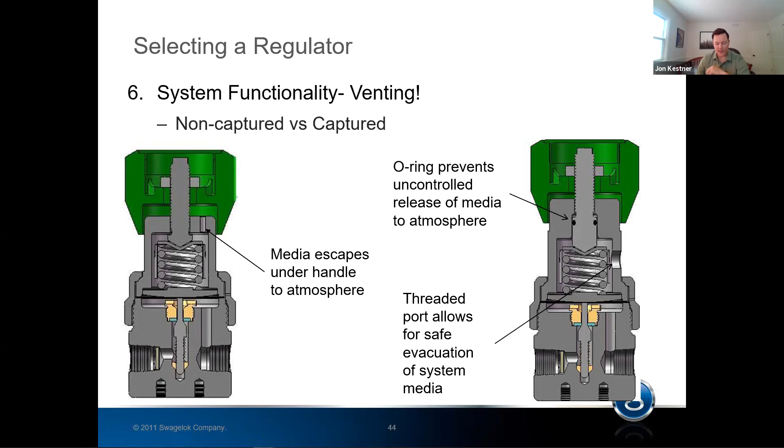Yeah, so it's a good question, right? And one that's particularly interesting for captured vent regulators. So if you have a captured self-vent especially, you could, over periods of time, have all of these components exposed to whatever that fluid is. And so over time, you may want to keep an eye on things like the spring and all that.

Now, that being said, we take care to make sure that the materials of construction, at least in our regulators, are pretty suitable for any of those medias that you might get going through there.

But it's a really good piece to put in if you're developing a preventative maintenance or an inspection or testing plan. If you have those self-vent or captured vent regulators, add those components, the not traditionally wetted components, to that plan.

So springs are a big one. If you have a pretty corrosive media, certainly talk to folks about what spring material might work best, but just add them to the inspection plan.

And then in terms of regulators in general, how often, I get that question a lot, how often should we be going in and inspecting parts, doing tests, doing teardowns or maintenance?

And the first answer is, whatever the local regulations require. So here in the States, we don't have too much prescriptive regulation as far as pressure control components. Places like the UK and Europe are a little bit more controlled as far as how often they need to either maintain or replace. I think it's 5 years in the UK that you have to either maintain and test or replace the unit.

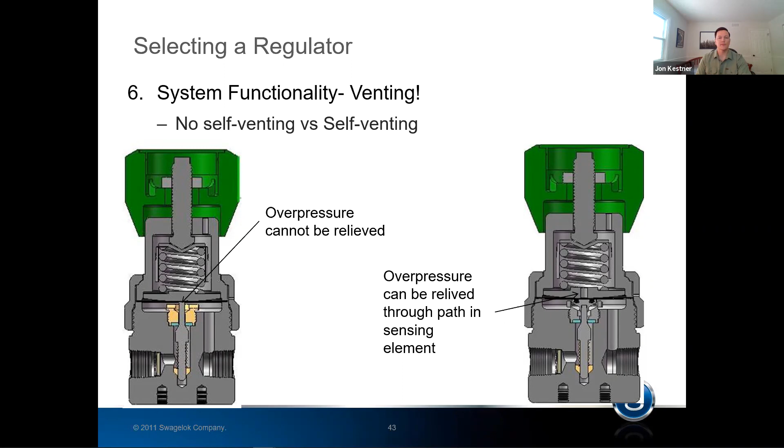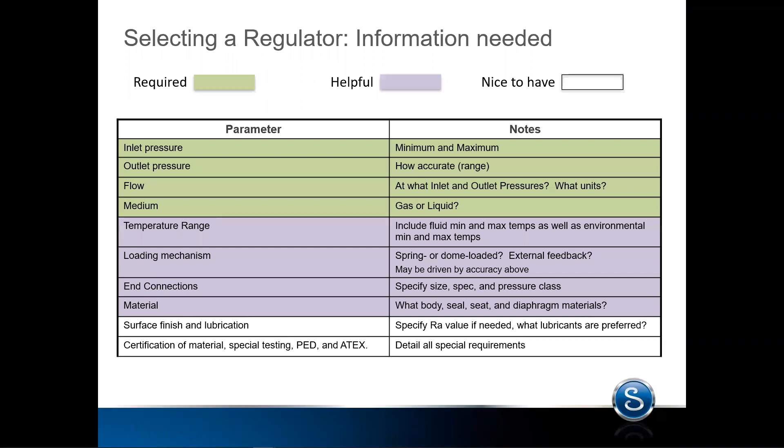We have two more here. First, is it best practice to use an isolation valve upstream of a pressure reducing regulator, or vice versa?

Yeah, that's a good one, and it relates back to our discussion on creep. If you can, isolate upstream of a pressure regulator, and that does a couple things for you. One, it allows the regulator to be kind of freed from pressure isolation.

If you isolate here and vent down the system, you'll have zero pressure upstream, zero pressure downstream. The regulator's happy. Now, what it does is, something to consider, is that regulator then doesn't have any other forces balancing against your set point or loading force. So the regulator will actually sit in an open position, which is actually good, because you don't want that regulator taking a set on the seat if it's closed for a long period of time. But you will get a slight overshoot when you start the system up.

We actually test for this in our production testing. All regulators go through production testing, and part of that is an overshoot test. Essentially, that regulator seat needs to catch up before it can start controlling pressure. Generally it's well below 10% of the control range. So on a 0 to 100 PSI regulator, you might see 3 or 4 pounds of overshoot, and then it quickly gets back under control. So upstream, if you can, that's going to give you the best creep performance.

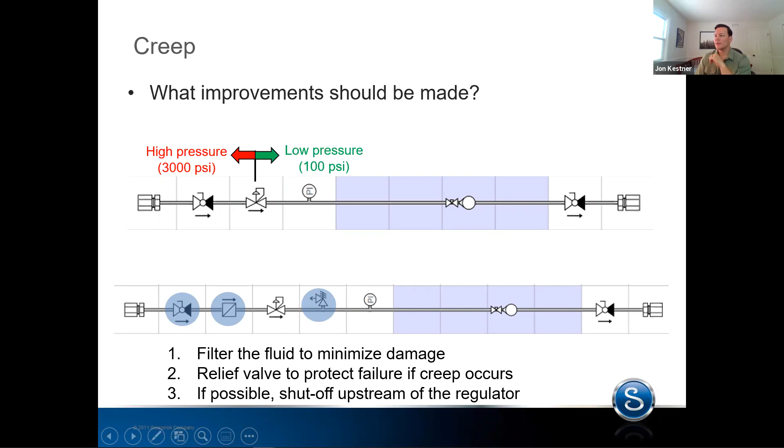I'm trying to see if I have a decent slide for it. Not really, probably the best one is our flow requirement slide. So the question, as I understand it, is the best practice for setting a regulator from lower pressure to higher pressure, or the other way around, higher pressure to lower pressure. And you've got it exactly right, in that the best practice is always to set with increasing pressure. The reason for that is actually related to the spring, but it's actually a phenomenon called hysteresis.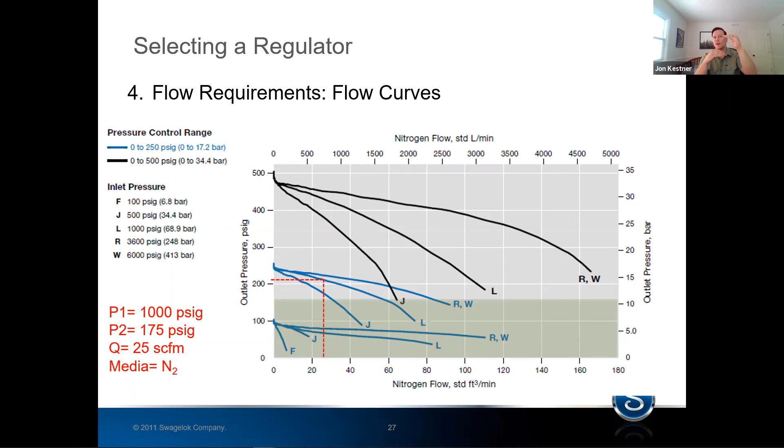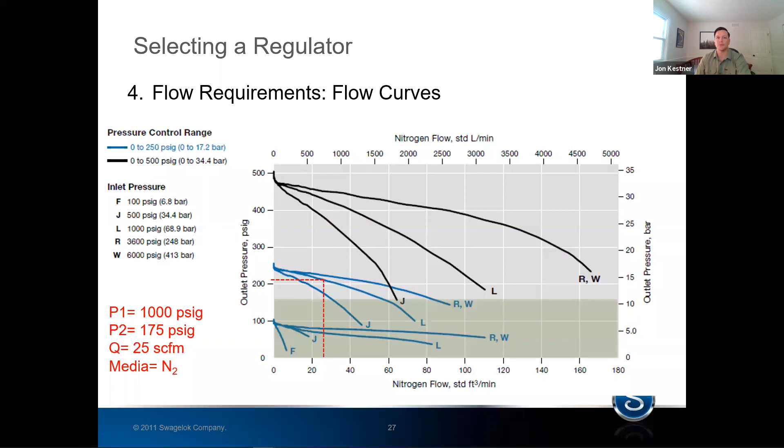You will eventually hit 400, but because of the internal frictions in the regulator, so all those O-rings and the sensing element, the poppet, things like that, you'll actually see that over time you'll go from 400 down to maybe 395 or 390 as that regulator settles in. Whereas if you go from low to high, you don't get any of that settling out, and you stay in a pretty consistent pressure. So it is always a best practice, if you can, set from low to high pressures due to that hysteresis, which again is not something we specifically covered today, but is a consideration for those types of situations.

Okay, we have a couple more questions here. First, can you explain the working of dome-loaded regulators with feedback option? Also on the dome to outlet pressure ratio.

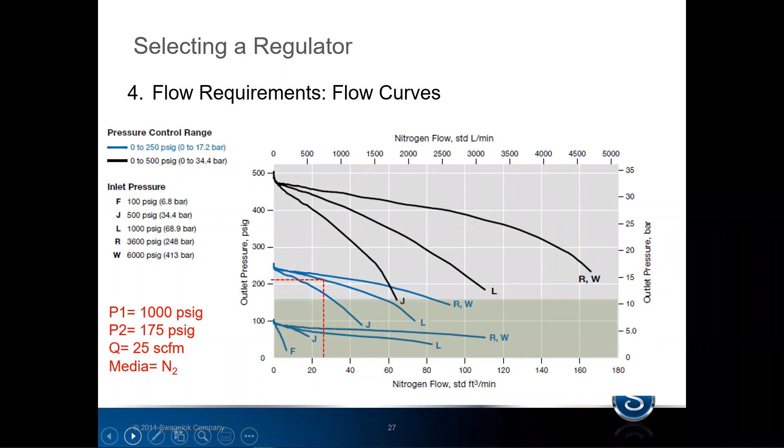Let me find... I don't have a good slide that talks about feedback, but I'll try to talk you through it. What I would say is if you have a system with a wide flow range and really tight accuracy requirements, talk with the local team and they can get you connected with the right folks and the right pieces of equipment that'll be able to deliver that. So while I don't have a good slide to show you visually, let me talk through it.

A dome-loaded regulator, as I mentioned, swaps a spring for a pressurized dome of gas. Same exact concept. The loading force is then created by that pressure, so pressure times area, in this case on the top of the sensing element, creates a downward acting force.

Now, in most dome-loaded pressure regulator setups, you've got a pilot regulator. Actually, I've got a good picture of one later on in the slide deck, right here. Here's the pilot regulator - this is actually a 4-inch pressure regulator, some of the biggest ones that we make, but it's a good example. So you feed the dome pressure through this pilot, which you control just like any other spring-loaded regulator.

That then sends the pressure to the dome, pressurizes the dome to create your set point, and any of the excess - manufacturers have different methods for controlling that dome pressure. At Swagelok, we use what we call a dynamic control loop. Basically it's got a tuned orifice on the end of this and controls a very low flow rate through the dome. So what you end up with is a pressure creating your F1.

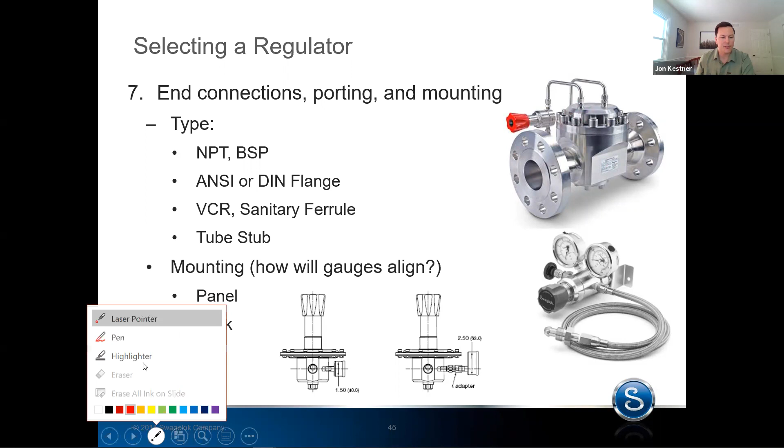Now, one thing to remember - I'm going to skip back to our balance of forces equation - is that we know we need the F1 to balance not just F3, but also F2 and F4. So very often we describe dome-loaded regulators as one-to-one, right? Whatever you put in the dome, that's what you're getting out the outlet side. When in reality, as most things in reality, it's a little bit messier than that, in that you actually have to have a little bit higher pressure in the dome to get a specific outlet pressure, because you have to balance also against F2 and F4.

So your F1, maybe your pressure in the dome is 105 psi, but your outlet is 100. We still call those one-to-one because it's the same sensing element, so the areas above and below are one-to-one. But in reality, it's actually like 1.05 to 1 or something like that, depending on the model. So it's not exactly one-to-one. Good question there.

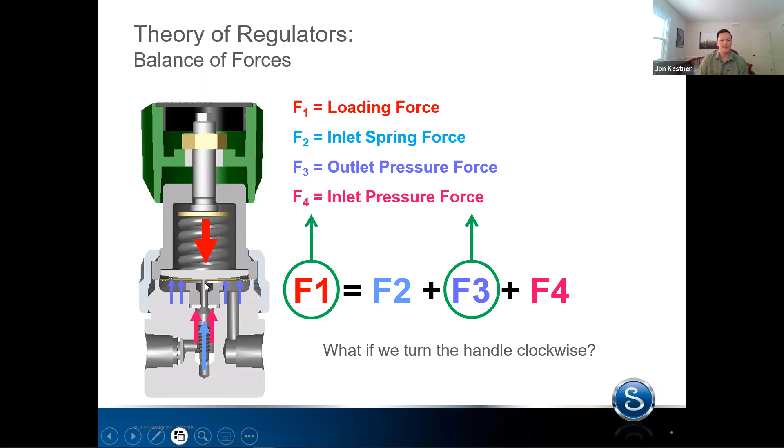Now, when we think about external feedback and how that plays into pressure regulators, there's a ton to unpack there, and I wouldn't want to go into too much detail without a lot of the visuals that we do have. So I would encourage you to contact the local folks, and we can definitely get you set up.

But what external feedback does is, instead of sensing the pressure right here - our F3 is created by the pressure within the regulator - what we can actually do is take a point in the system, right next to what we care about, whether it's a piece of equipment or a process or whatever, and we can create a sensing line, let's just say it's down here, and tube that back to the regulator. And then what we do is create a little sensing chamber that's isolated from the rest of the regulator and only taking pressure from the system where we care about it. That gives the regulator the ability to kind of see what's happening in the system versus only reacting to what's happening in the regulator.

It gives you really good control, and it's an awesome option for those critical applications where accuracy is paramount. So hopefully that helps.

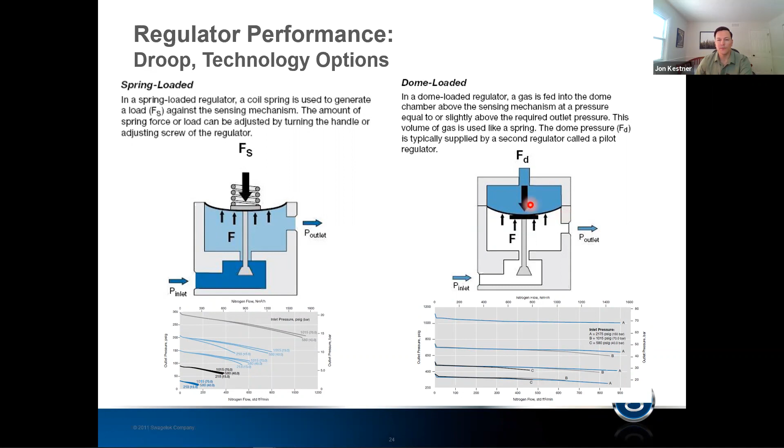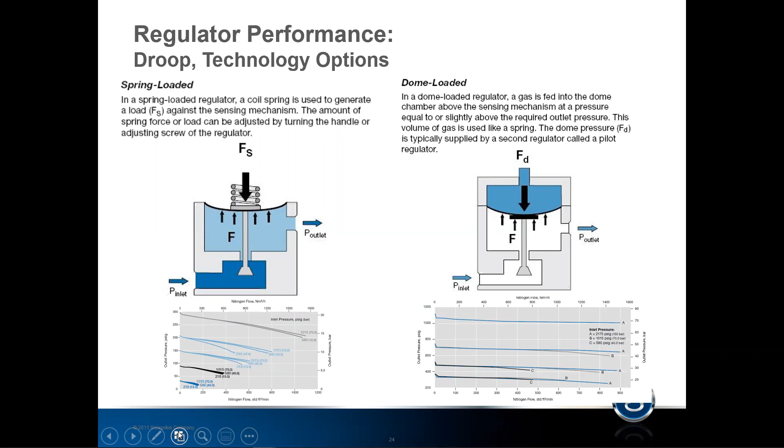And then we have one more question. For corrosive or sour gas applications, is there an affordable regulator available, spring type, if you don't want to buy a feedback type regulator, media loaded?

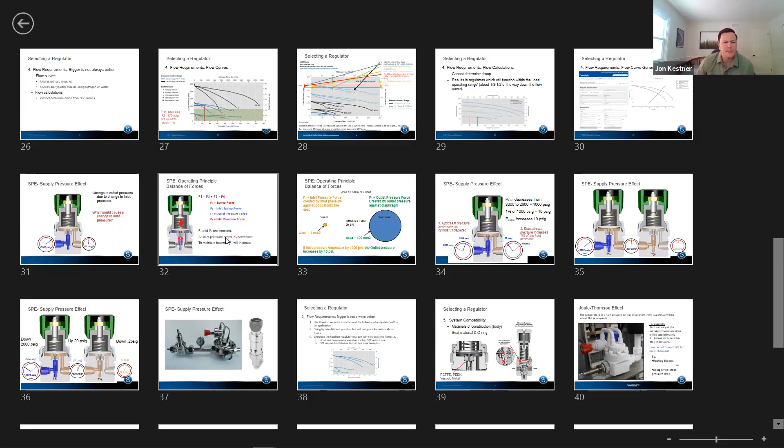Yeah, so we'll go with this one just so I can show you the guts of this regulator.

So the question really is, when we talk about hazardous or corrosive media, what are the things we're concerned about? What always jumps out to me is a couple things. Can the seat take it? Because if your seat is shot, your regulator won't have good control, even when flowing, and it certainly won't shut off. So is the seat compatible with that material?

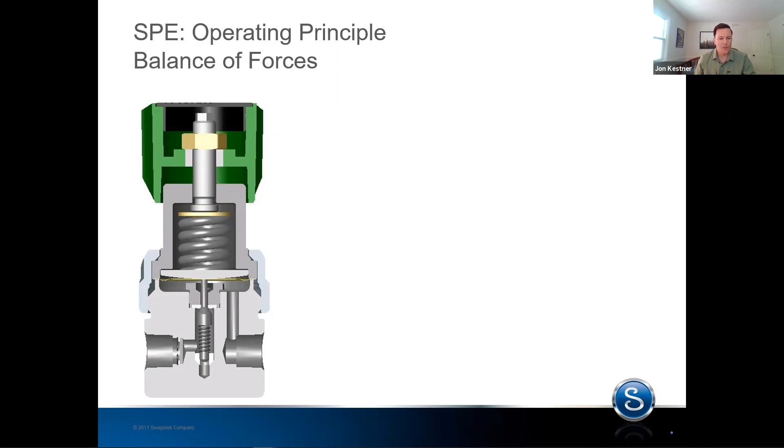Let me see, I think I've got a good cutaway of a piston style, because that's where it gets more interesting. So not only the seat, but also any of the O-rings, especially the dynamic ones, like a balanced poppet O-ring, which we didn't cover today, but it moves against the surface in the regulator, much like a piston style regulator seal would. If those seals get chemically attacked, they tend to swell, and can get damaged or torn and effectively not perform their function anymore.

So you want to make sure that for chemically aggressive medias, you have the right seats and seals. A lot of the seats we use are PCTFE or PEEK, they're really rugged. When you start getting into the elastomers, that's where you can see pricier options, specialty compounds like Kalrez and things like that, which will drive costs up.

Now, in terms of overall regulator configuration, the other thing to think about is the diaphragm material, particularly for things like sour gas, where the hardness of that material can play a role in its overall longevity. When you talk about a diaphragm, you've got to walk this fine line, particularly for metal diaphragms, where you want to maintain the ductility or flexibility to give good cycle life or fatigue life, but you also need the strength to stand up to these high pressures and forces we create.

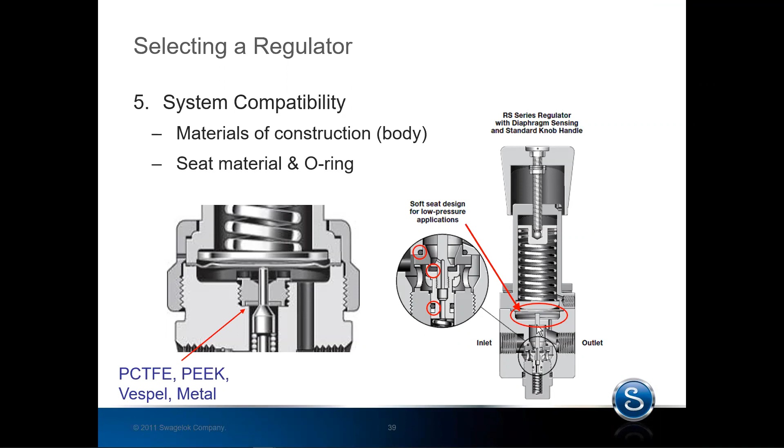What else? We have one here that asks, is ASTM G93 level C better than ASTM G93 level E cleaned, or is it vice versa? No, you've got it the right way around. ASTM G93 outlines the cleanliness levels for oxygen-enriched systems, and the levels are defined by the amount of hydrocarbons per square foot, and they go from A to E, with A being the most clean, and E being still very clean, but the least clean in that range.

Typically, the most common oxygen delivery systems require ASTM G93 level C, and that's also the cleanliness level that Swagelok requires for any SC11 cleaned product, if you've heard of that. So we have the ability for most of our regulators to be cleaned to SC11, which meets all the steps for that process, including bagging and packaging, as well as ASTM G93 level C. So generally, when we call it level C, that means we just don't package things in the same way that SC11 would require.

Most often that's driven by the size of the regulator. Much bigger process-oriented regulators wouldn't get put into a double bag. We would use end caps or other methods which aren't specifically called out in SC11. So that's why you see a difference there. But we do have the capability to clean our entire line to ASTM G93 level C if required.